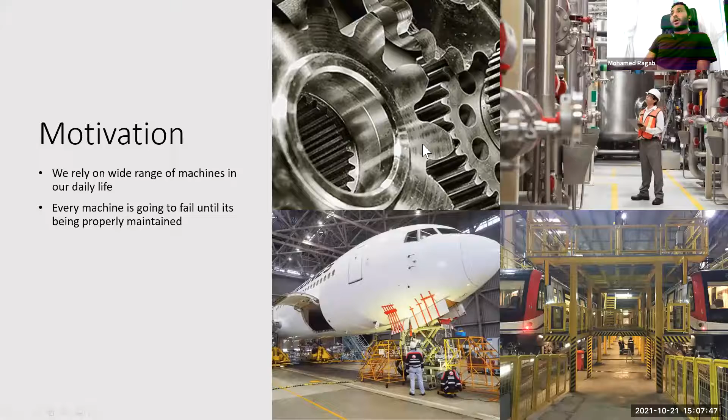Okay, how to do maintenance? This is another question. There are three famous maintenance strategies. The first strategy is called reactive maintenance. This is quite simple, where you replace the failed or damaged components after failure. You can adopt this approach if you are working with simple machines or simple components like a light bulb. But with very complex, real industrial machines like turbofan engines, this can be extremely costly and affect safety. You cannot afford such failures.

So another approach, rather than just waiting for the failure then replacing the damaged components, is preventive maintenance, the most famous one so far. Preventive maintenance mainly aims to do regular maintenance on the machines to prevent them from failing. However, to do so, you need to be a bit conservative. You cannot wait for the machine to fail; you need to do it a bit earlier than the machine failure. So you have large downtime.

Each time you do maintenance, you shut down your factory and then apply your maintenance. But this can be extremely costly, because for some manufacturing industries, downtime for 1 hour could reach $2 million. This is too much, and it's quite costly if every time you do maintenance, you remove some parts, increasing the downtime. This is not the only problem. The problem is that you can remove some parts that are still usable, because you are not maintaining based on the machine condition.

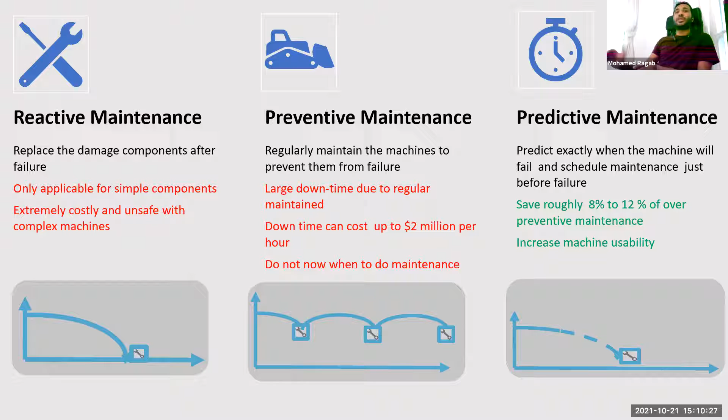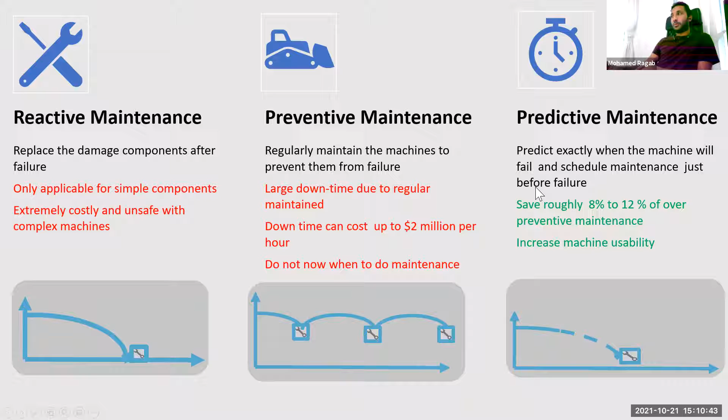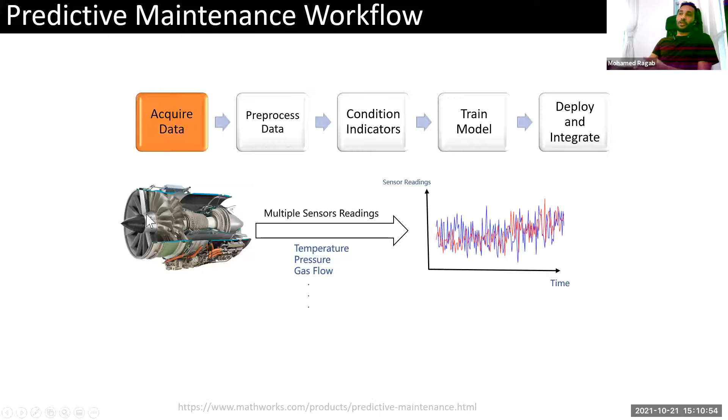And this can actually, estimating now, people start to apply this, you can save roughly 8 to 12% over preventive maintenance. However, actually, knowing exactly when the machine will fail is a quite long-standing problem. Okay, let's go through some of the process that we usually do to apply for predictive maintenance. Usually given some data and multiple sensors applied to, for example, this is a turbofan engine. And these are the sensor readings that we have.

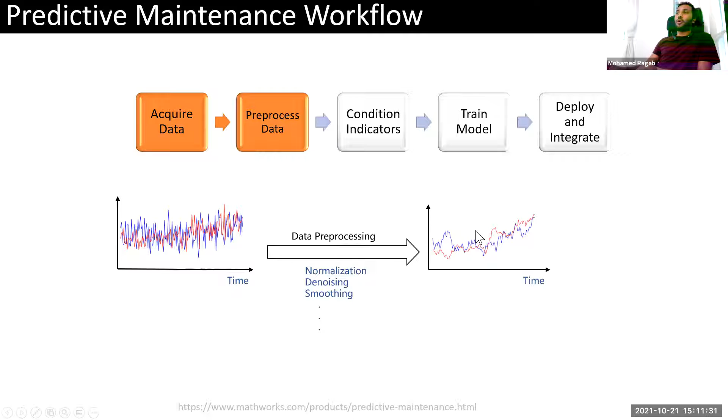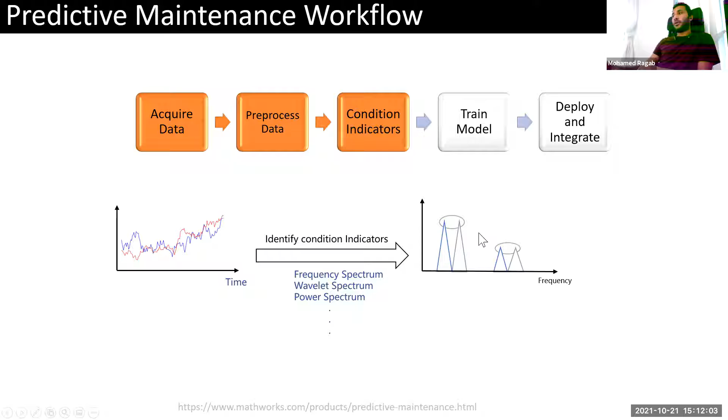By leveraging these condition indicators, we reach our end tasks where we do anomaly detection first, whether there is a fault already happened in the machine or not. After we assume that we have a fault, we need to classify what type of faults. We need to detect where exactly the failure part is. And actually another, which is the most important one, is the remaining useful life estimation. Where given the current machine condition that has not failed yet, you need to estimate when exactly the machine will fail. And this we call the remaining useful life.

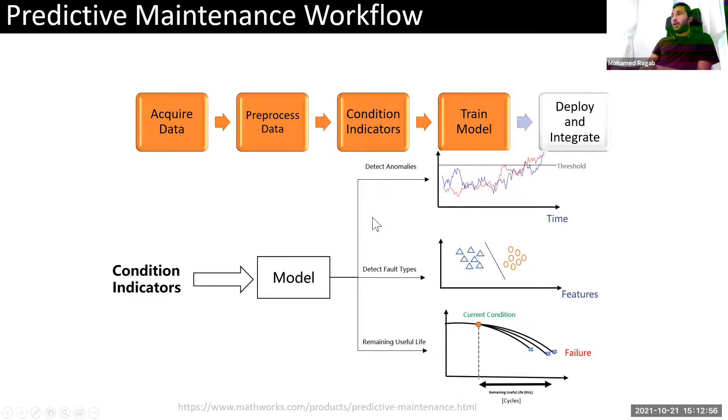In this talk, actually, we will focus on one task. We will talk about fault classification, just for the time limitation. If we have time, we may introduce this remaining useful life estimation. Okay, finally, after you already developed your model, you can deploy your model on the edge device or on the cloud. This is a summary of the predictive maintenance workflow.

Okay, then how to develop such models? As I mentioned about a model. Actually, models can be either physics-based model, where experts try to mathematically model the deterioration process of the machine, and based on this mathematical modeling, I can try to do my own task, either anomaly detection or fault classification, or even remaining useful life estimation.

However, recently, there is evolving complexity of the industrial machines, and actually, physics-based approaches are no longer easily attainable because it's becoming very, very complex, and even experts cannot easily model this. At the same time, with the big data era, lots of data from these manufacturing industries are available. So leveraging this data, we can actually leverage data-driven approaches and the advances in data-driven approaches and this availability of data to improve the performance.

Two main approaches have been followed in this application. One main, which is a conventional machine health monitoring approach by using conventional machine learning, by manually extracting hand-designed features for each class or for each task, and then use some conventional techniques like LDA or PCA, and then apply your classifier like neural network or support vector machine.

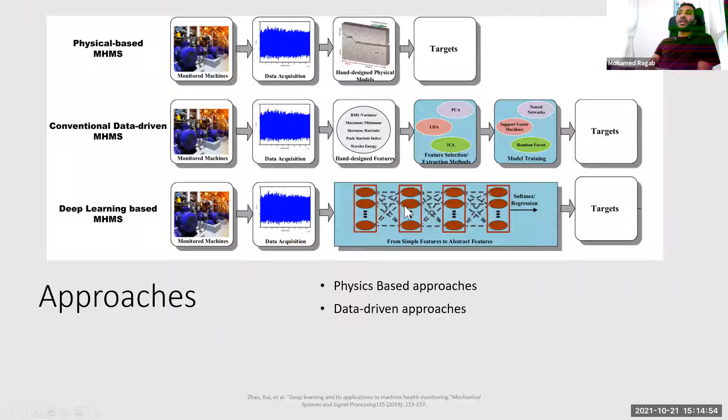However, these kind of conventional machine learning approaches can be time consuming and not robust, because you need to manually design each feature for each class, and not scalable actually. Recently, we know that we have large availability of data. People have leveraged deep learning to automatically extract features rather than relying on domain experts. You can automatically extract features with the availability of data.

However, deep learning now is achieving state-of-the-art performance, but it mainly works under two main assumptions. First, that training data and testing data are sampled from the same distribution. And second, especially for deep learning, the most successful paradigm is supervised learning so far, and it mainly relies on the availability of vast amounts of labeled data. But in the realistic real-world manufacturing industry, are these assumptions practical, or can we deploy such models with these limitations?

Okay, let's see. Assume the same machine, for example, is already deployed in different places all over the world. This machine is already working under different working conditions, in terms of temperature, pressure, lots of things. If your model has been trained on this condition, will it be able to work well on another condition? This is a problem. Even inside the same machine, you could train your model on one part of the machine, but if you are testing your model in another part, this also could be challenging.

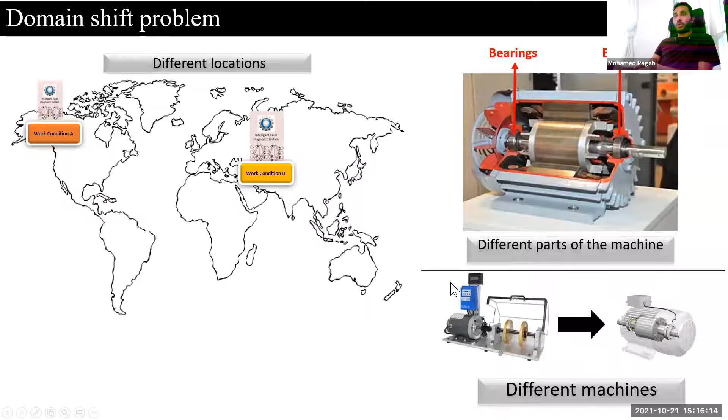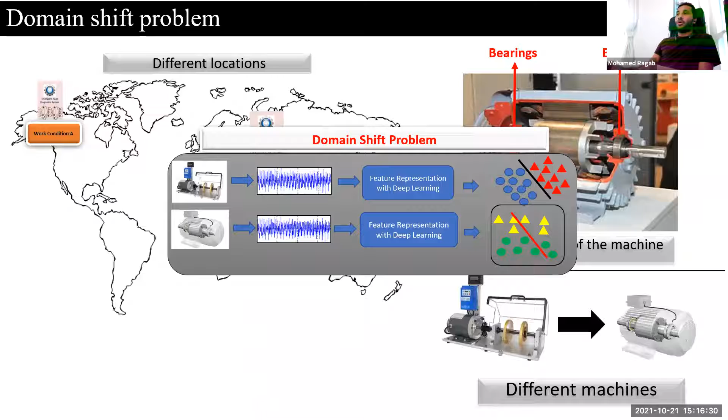Also, assume that I have no data for this machine, but I have data for a related machine. If I want to test my model for this machine, can I rely on related machines? Will it work? Actually, this is a well-known problem called the domain shift problem, where the training and testing are different, and because of this, even your model that has worked very well for the source working condition or the source location can fail to generalize well on the target, because of the variability of the distribution of the data. We need to address this problem.

We aim to address this domain shift problem, either between machines or between locations, but at the same time, we also need to assume that we don't have labels for our target machines. Why? Because for some machines, labels are failures. So when the machine fails, the label is what type of failure has happened. Some machines take up to years to fail, so waiting such a long time to get some labels is impractical.

And second, some machines are not allowed to fail. A turbofan engine of an aircraft, you cannot allow this to fail while it's working, which is a catastrophic problem. So because of these issues, the scarce label problem is an issue. So to address this issue, we propose our first work, which is adversarial multiple target domain adaptation for fault diagnosis. I will talk about preliminaries first.

We leverage domain adaptation, which is a sub track of transfer learning, but mainly tries to address similar problems. I will not try to be complex, but the key idea of domain adaptation here is that your empirical risk on the target domain is bounded by the empirical risk on your source domain, and the discrepancy or the differences between your source distribution and your target distribution. And these factors are related to the conventional VC dimension of conventional machine learning.

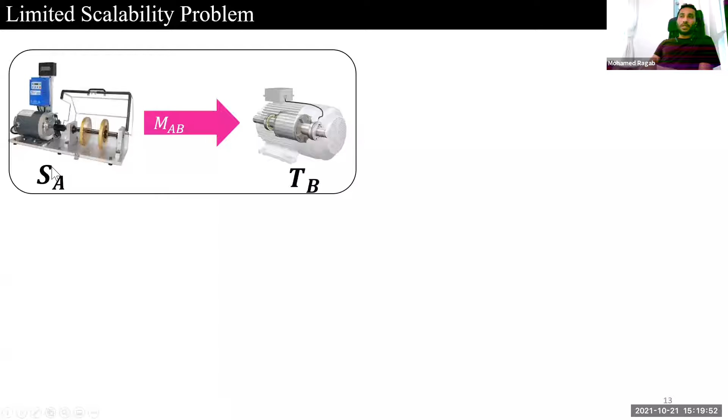To clarify, domain adaptation usually works with something called single source, single target. So you have a single machine, a source machine, and a target machine. If you change your target machine, you need to retrain a new model independently from scratch. Or if your source model has changed, you need to train a new model independently from scratch.

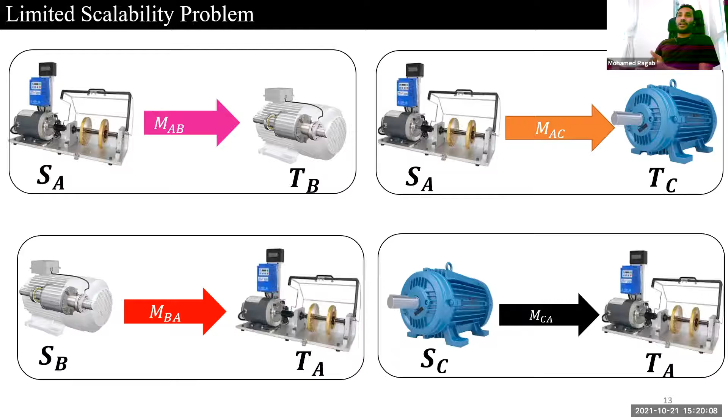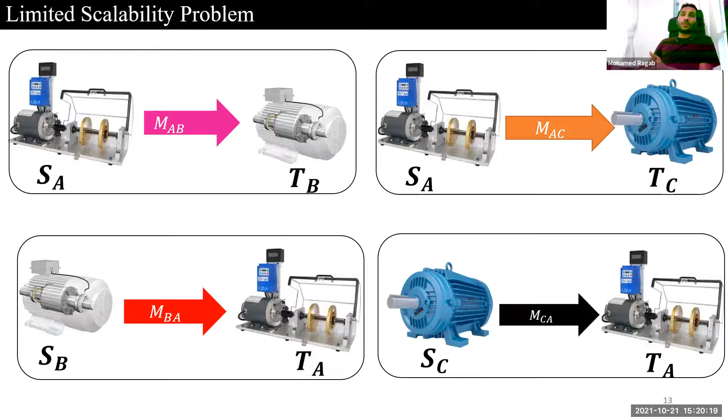So this is somehow not scalable because I can have multiple working conditions at the same time. Each time I retrain a new model, even if I can generalize well with domain adaptation, retraining a new model is not a scalable solution actually. Because for k working conditions you need to have this kind of number of models.

So in this work, we aim to address this limited scalability problem of these approaches. And also we assume we have varying working conditions, and we have unlabeled target data. So we devised a new approach called single source multiple target domain adaptation. We leverage adversarial domain adaptation with multi-class classification.

Okay, this is our architecture. The key idea is we first pre-train our model on the source data, assuming it's labeled. And then we have multi-target domain data, and we have a domain discriminator. The key idea is to train these 3 target models to produce domain invariant features such that the features of all target domains can be invariant from the source domain.

After doing this, we can pass any of our target domains, and our target mapping, which is domain mapping here, can map this target to a new feature representation that is similar to the source. And now the source classifier that works well on the source data can work well on the new adapted representation of the target data.

Okay, this is the algorithm. We have 2 main losses actually. There's a cross entropy loss, which is normal for the source pre-training, and the adversarial multiple target domain loss, where we try to train multiple feature extractors against the discriminator. And this is the algorithm.

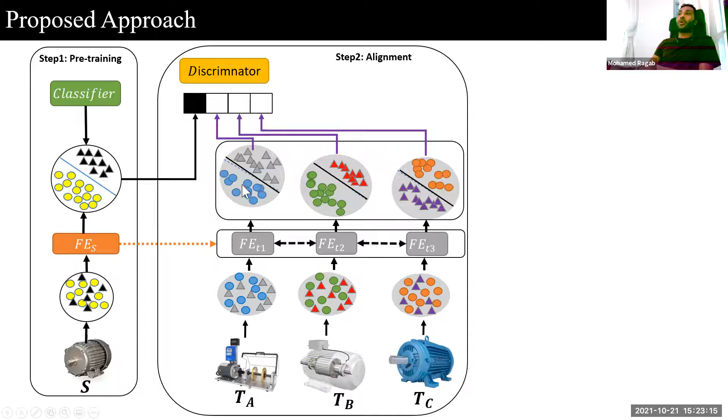This way, the classifier that works well on this feature representation can work well on this new representation of the target data. And in our testing, we can directly feed any of our target domain data, and our model can work very well. This is the approach.

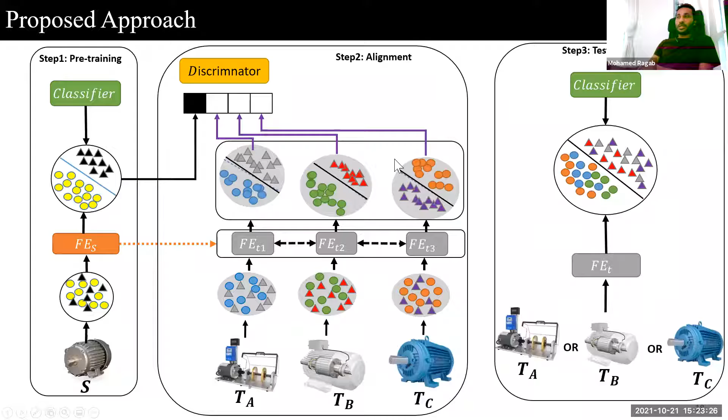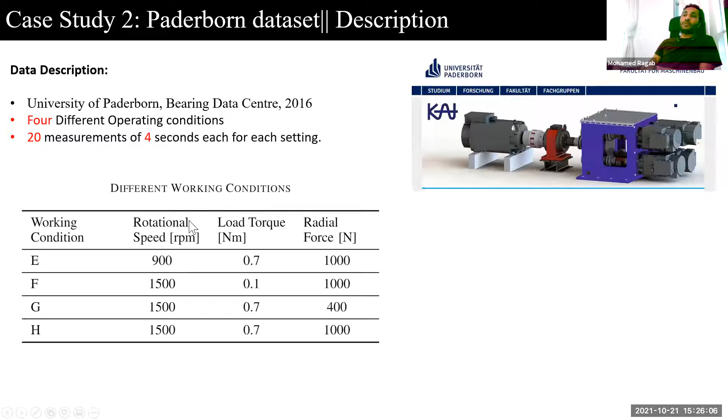Also, our code is publicly available on GitHub.

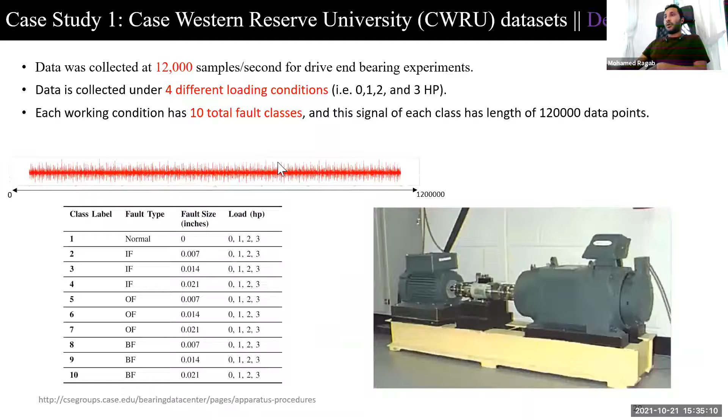These are some of the future works, because by the way, this is for the fault classification task. I also have some work for the remaining useful life estimation task. This is usually applied for turbofan engines, where given the data at current condition, I need to predict exactly when the machine will fail. This is a failure point that didn't happen before.

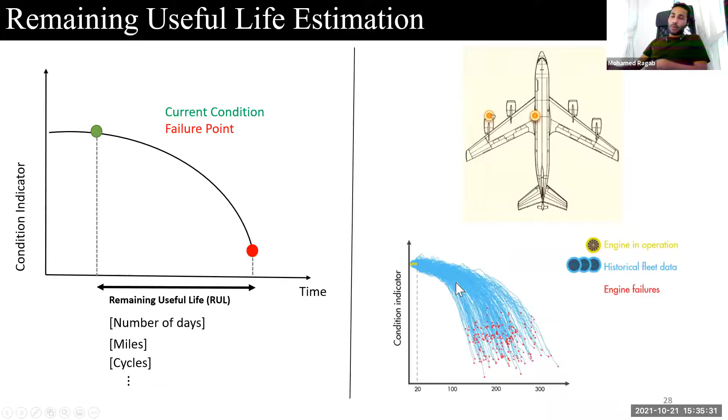We usually rely on history, because we have multiple historical engines that already failed for old aircrafts. So we rely on this historical data, and we just try to measure the similarity between our curve here and the historical curve, and try to select the most relevant curve and predict the corresponding failure point. This is the remaining useful life task, another task we are doing which is not classification anymore, it's regression.

Okay, so we have two more questions. One is from Terrace: what if the new machine has different input, like different frequency?

Yes, this is always the case. That's why domain adaptation plays a role here, because this is usually called covariate shift bias. The key idea is that directly testing your model from historical to new data will not work, so here we rely on domain adaptation. When I test directly it doesn't work, so what do I do? I measure the statistical distribution of each source and target, and try to minimize these differences between the distributions of the historical data and the new data. At the same time, I apply my normal Poisson loss, for example, or my normal mean square error loss. This way, I can improve the performance of the target domain without needing additional labels.